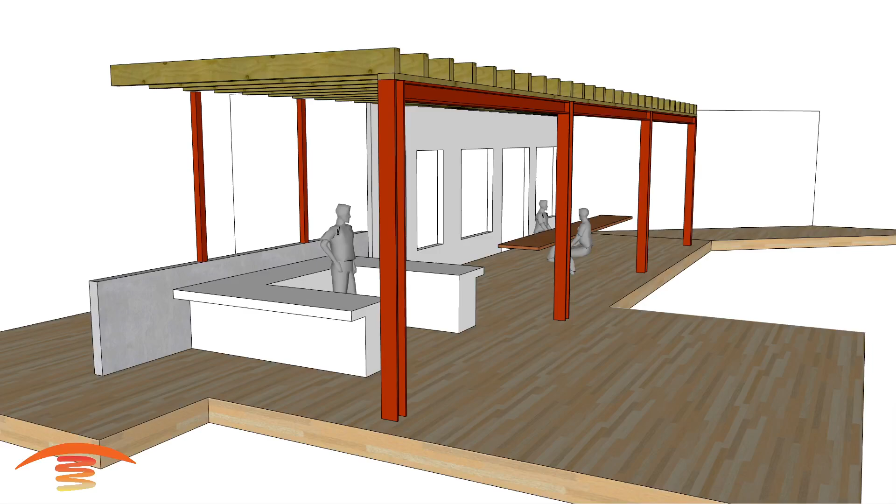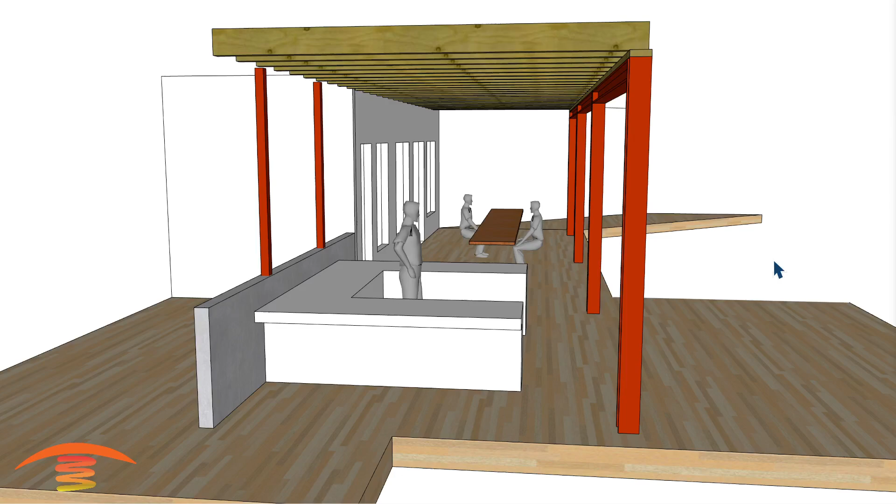Hi, Steve here. So, in reply to your comment that you emailed, I just want to show that I've made a couple of changes, and I wanted to show what I think is the layout that you're looking at, as well as what I would still recommend based on the coverage that you can get with the one that I believe you recommended.

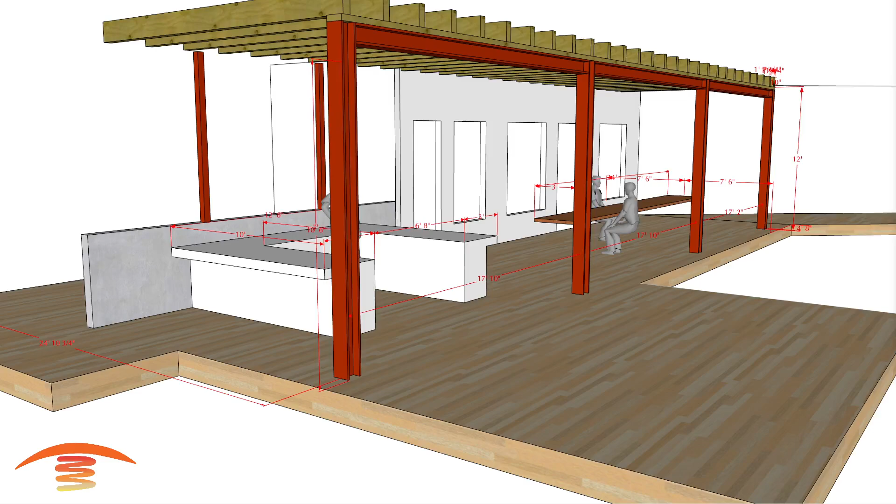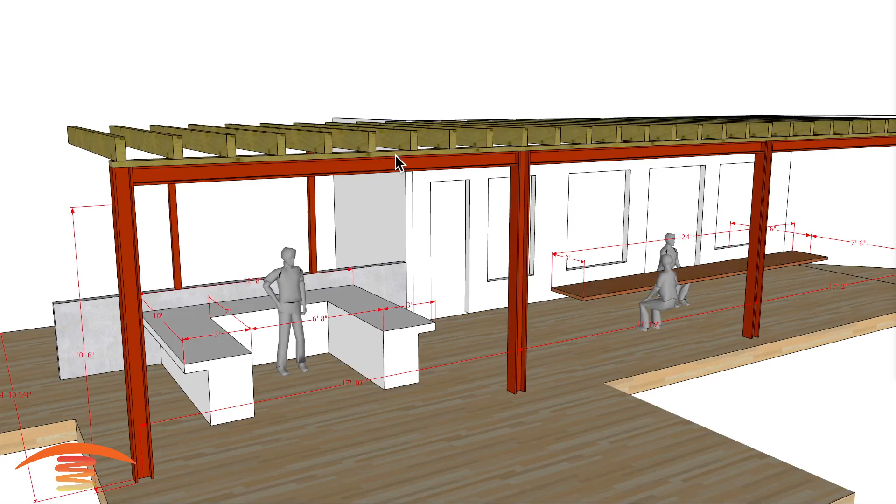So, first of all, let's look at the dimensions. I still have this at 12-foot height, but you mentioned that you have a drop ceiling of 10'6". So I'm assuming that there's some distance between the beams up here and the drop ceiling. So that is going to be important. I have it at 1.5 feet right now, and we'll need a minimum of 8 inches if that is true, and also if the ceiling joists will be going parallel with these upper beams here.

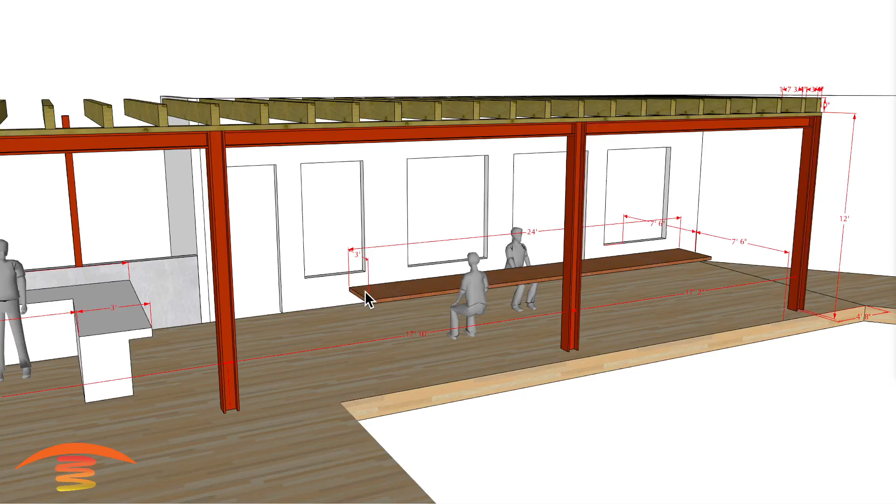The other thing, too, is I don't really know the true dimensions and whether you're looking at heating up the bar area, if this is a bar area on the outside edge. The table here I have still at 24 by 3. And I still have this distance here at 12 feet from the wall to the outer edge here. And I think that's about it as far as that information is important.

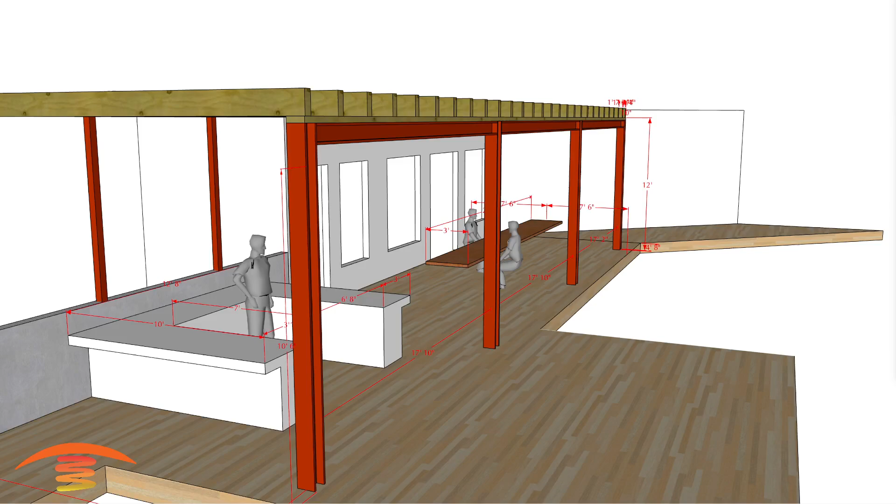Let's go ahead and look at the system that you have in mind: placing the heaters centered within the distance between the table edge here and the beam above. So I put that centered in here, and you can see that the heaters are all pointed straight down. These are 6,000 watt WD models in flush mount kits.

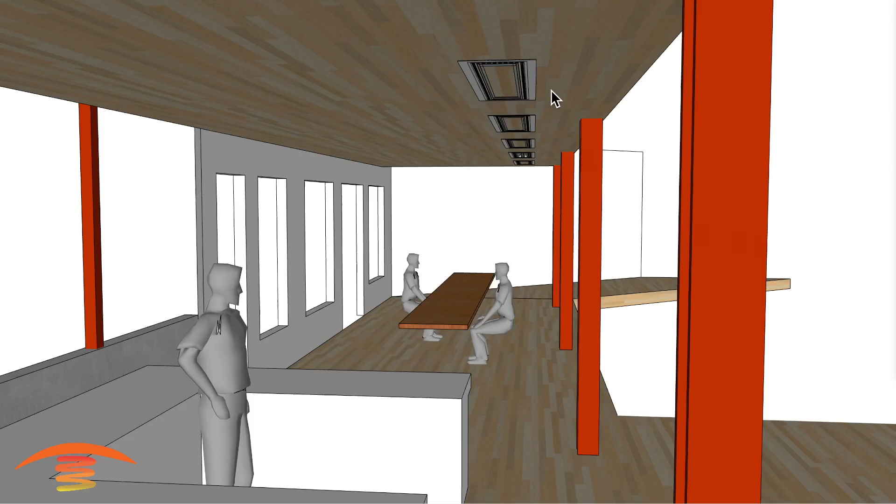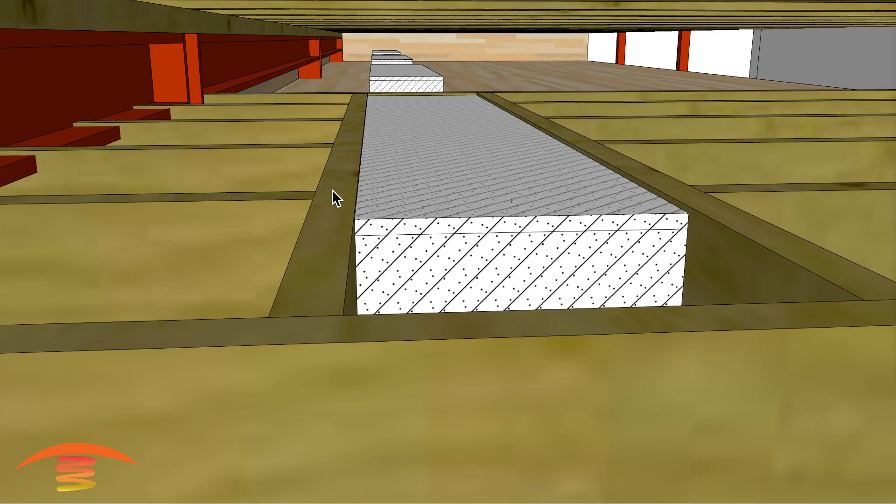The other thing I want you to see is that if you do have these and you have the ceiling joists going in this direction, you're going to need to box that in somehow. So what I've done here is show how the boxed in area for that ceiling is going to have to look. If this can be done, I'm not sure structurally how. Maybe these need to be double stacked or something of that nature in order to get the true support.

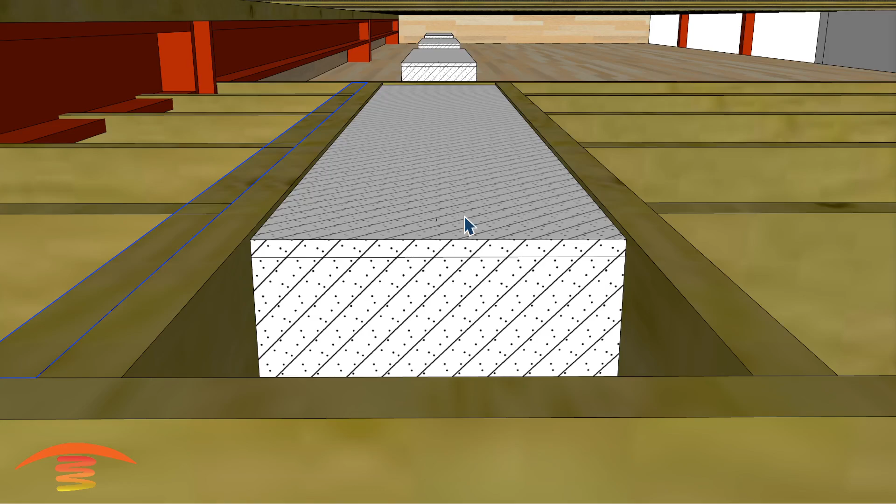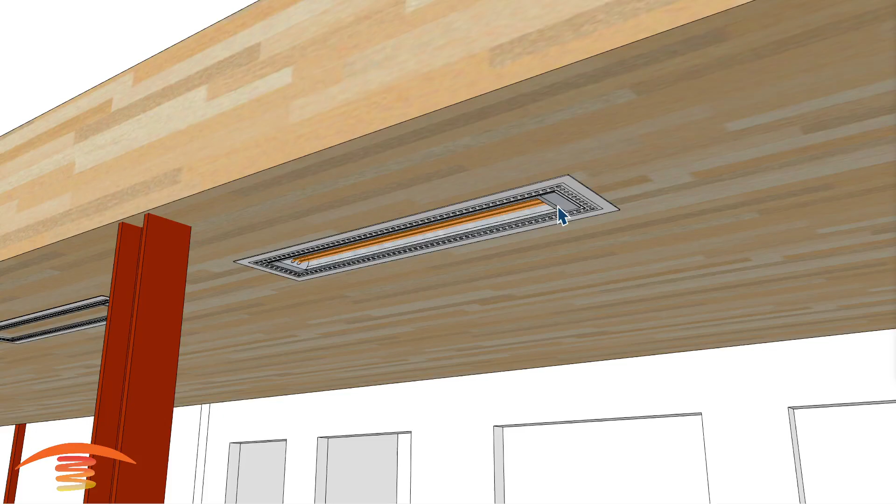But anyways, they need to be a minimum of 8 inches high, and you need to have a 1 hour rated firewall box installed here. So this will be 5/8 drywall, and it has to be around all 4 sides as well as the top in order to use that. So let me go back here too. This is the flush mount kit, and this would be the WD6024 model.

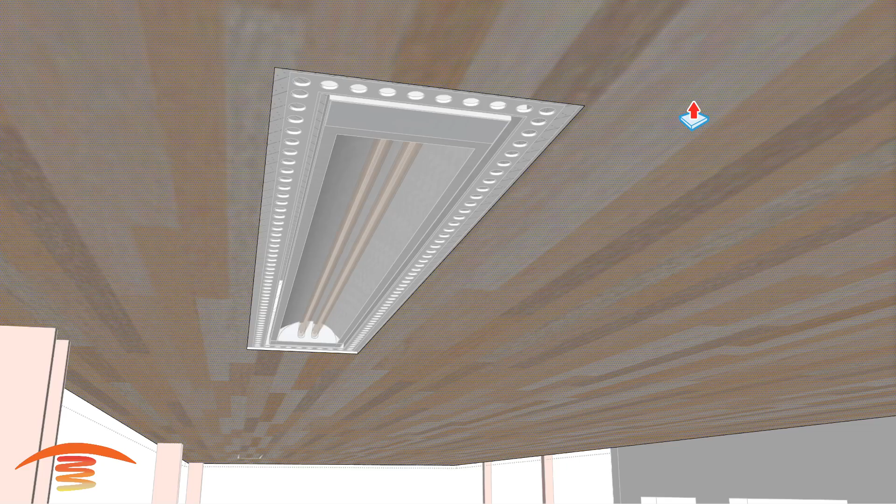Also, you can see I don't have these all done the same way, but this one's showing here because if this is a ceiling, you could have the heater itself mounted on the ceiling with a bracket showing, or you can drop this down. I don't know if it's going to be a wooden ceiling or not, but let's just say it's a 1/2 inch drop. If it's wood, the heater itself needs to be dropped as well, so this heater can drop in the flush mount kit to the same elevation as the ceiling if it's combustible.

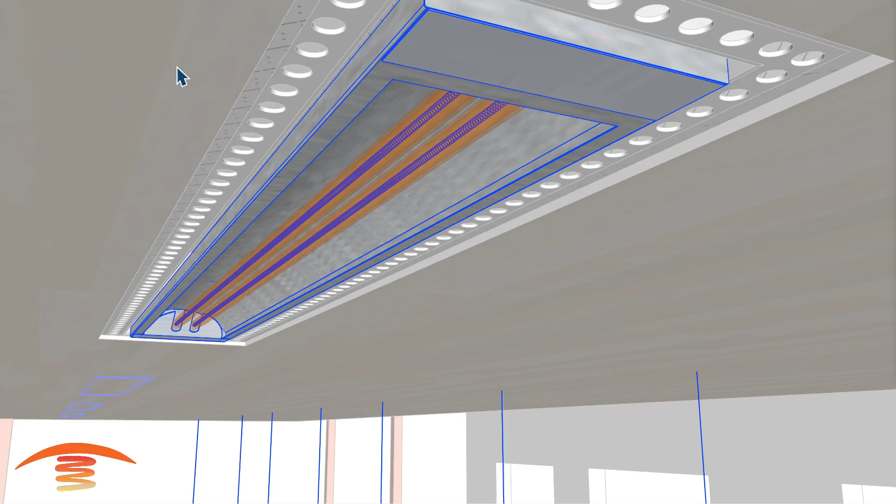So if it's a stucco ceiling, you don't need to do that, but if it's a combustible ceiling, wood or something of that nature, then you need to drop the bottom of the heater to the same elevation as the ceiling itself. I'm going to go ahead and turn that all back here, but I want you to see that it also looks much better.

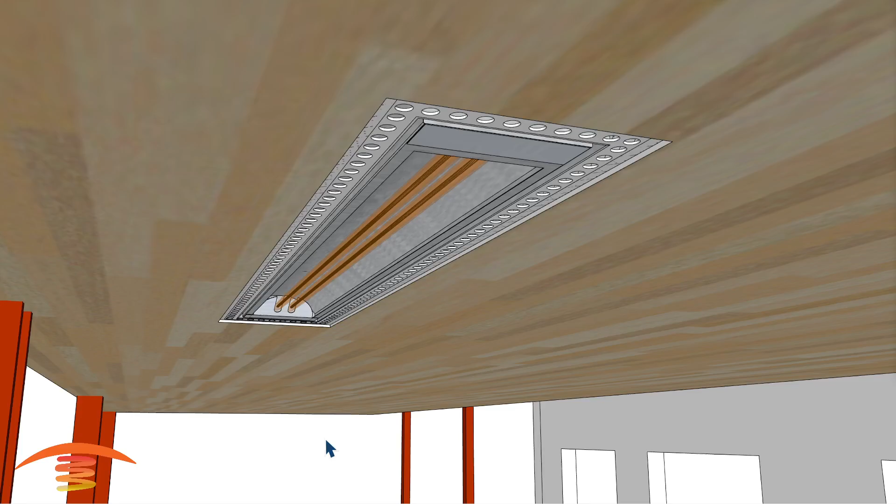Here's what it looks like attached to the ceiling with the flush mount kit, and then going back to pulling this down so that it's covering. You're not going to see the 1 hour fire rated drywall, but you will see the vent holes here. It needs to be 1/2 inch from the vent hole to any combustible surface like that.

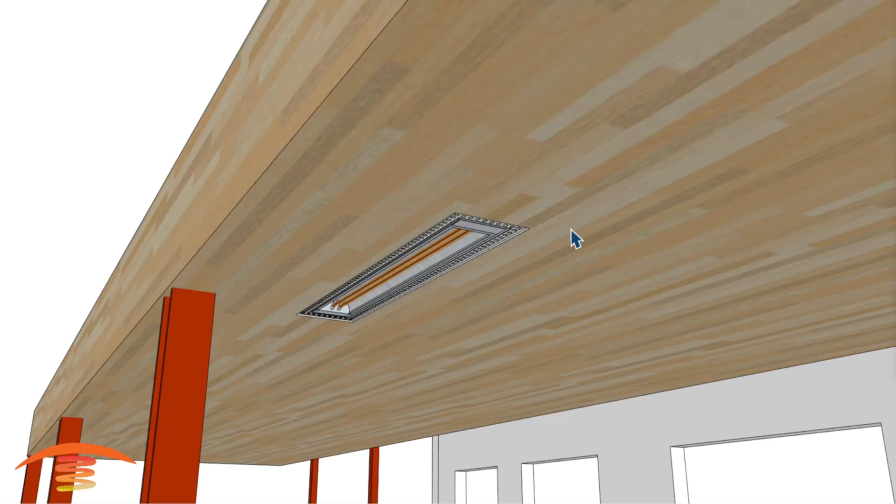As well as any stucco, so that you're getting the proper ventilation around the heater. I wanted you to see that because I think it looks much better in any application than this here itself.

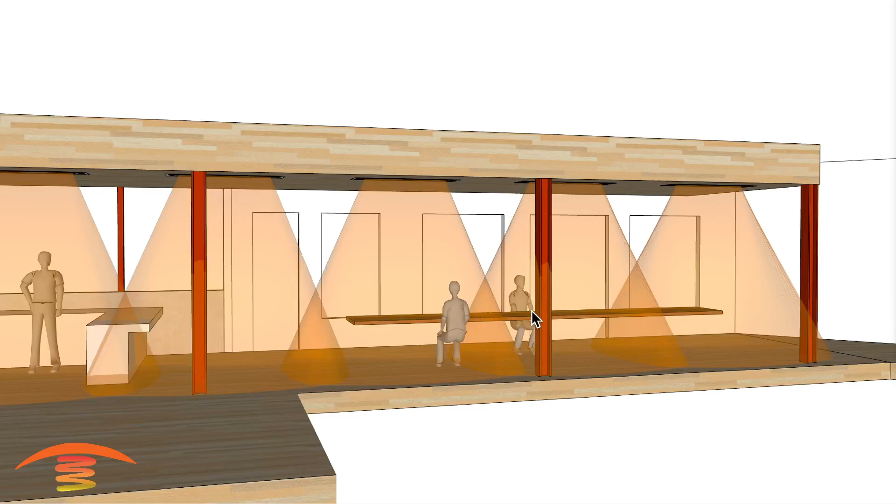Now let's go ahead and look at the footprint of heat that you're going to get. I have 5 units here, and obviously you could move these based on what that requirement is, as far as do you want it to heat up this space here, or is it more acceptable for just a whole line right here.

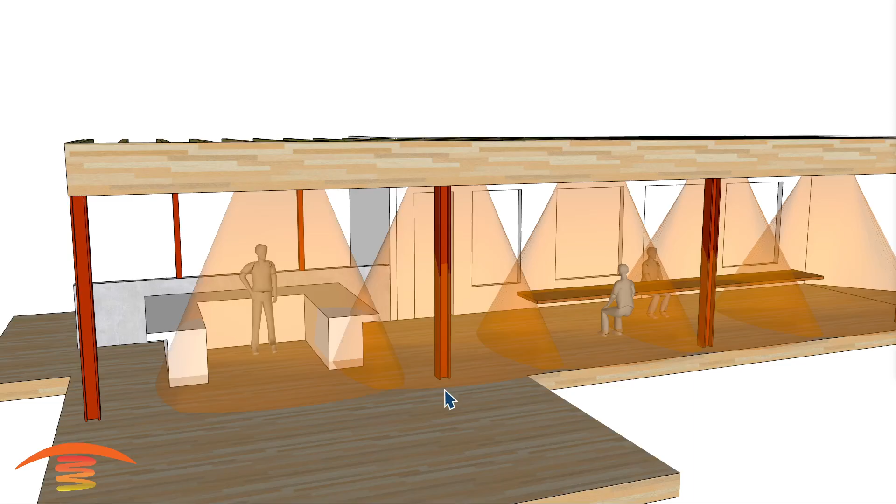But what I really want you to see is this is infrared light. Infrared light wave is not visible to the human eye. However, if you're not in that ray of light, you're not going to feel the warmth at all. It doesn't heat air, it heats mass, tables, chairs, and human bodies.

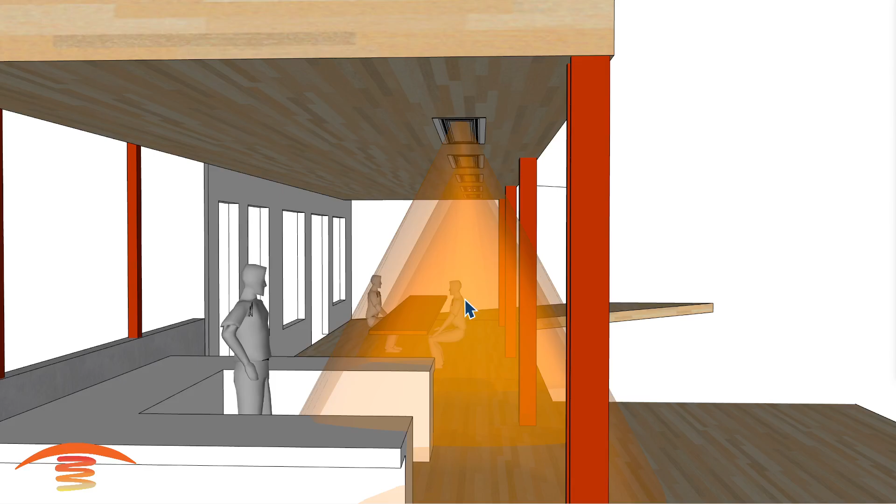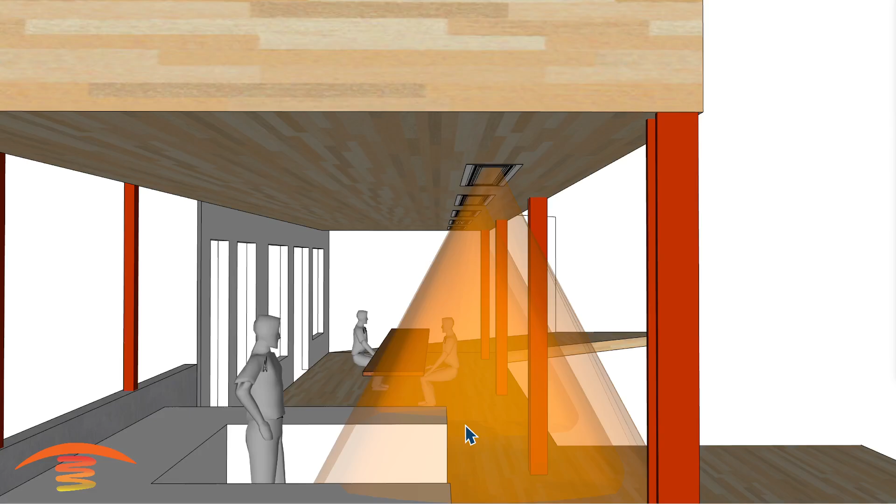So you can see here, this is going to be the only side that's going to be heated properly with it in this layout here. So that's kind of why I'm not choosing that. Now, another thing I should mention is with the flush mount units, you cannot angle the heater so that it is pointed towards this inner edge here. It can only be face down. So that's another thing you need to be concerned about.

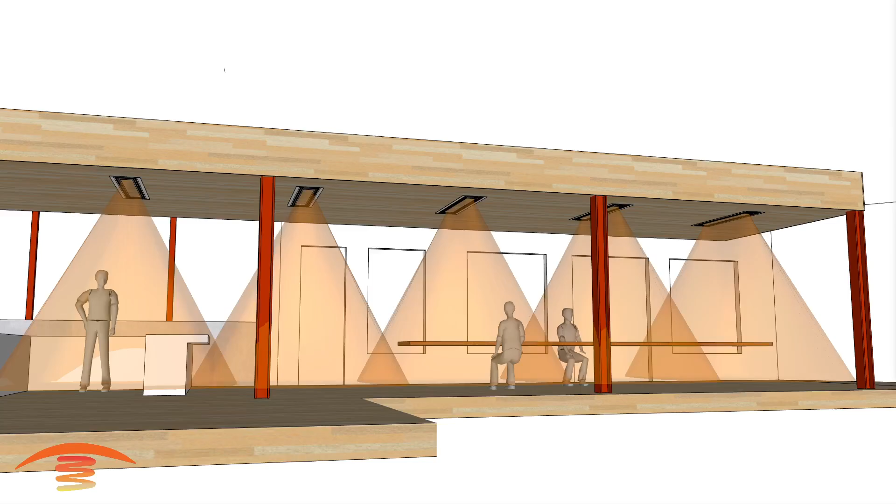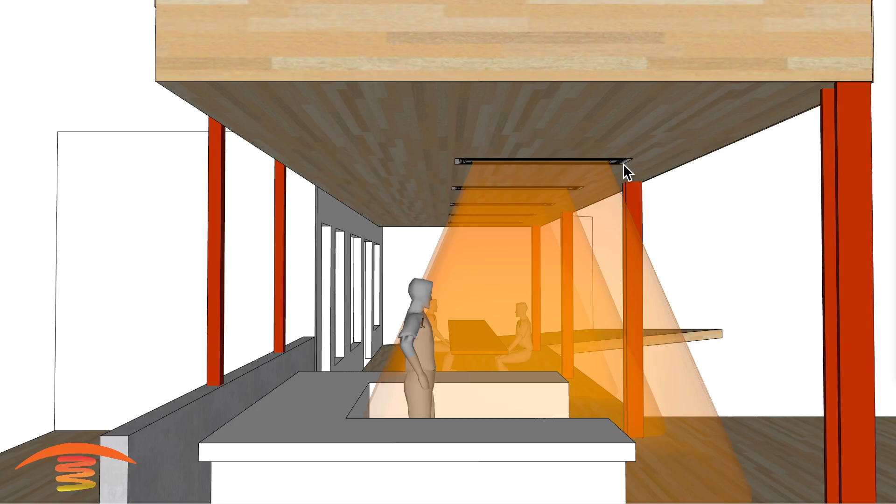Other than that, let's go ahead and look at what I kind of have in mind, more preferable for this application. What I did here is I didn't center the heaters. I centered the edge of the heater based on that point from here to this beam, and that's the starting point of the heater. You can see that it's a 61¼ inch heater, longer flush mount, but now we're penetrating more of the area that's being occupied on this side here with that layout.

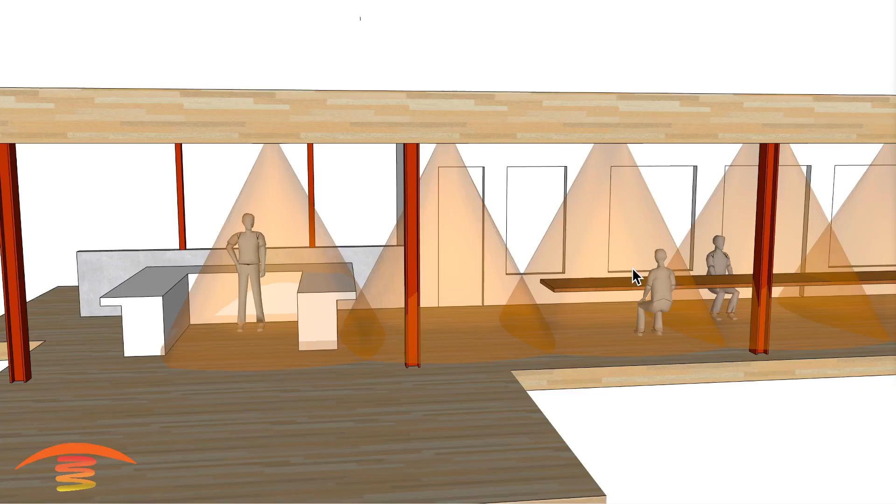Now I prefer it to be centered within the span, but I'm not quite sure what the purpose of having it off-centered would be for you. I'm sure there's some reason that you're suggesting to do that.

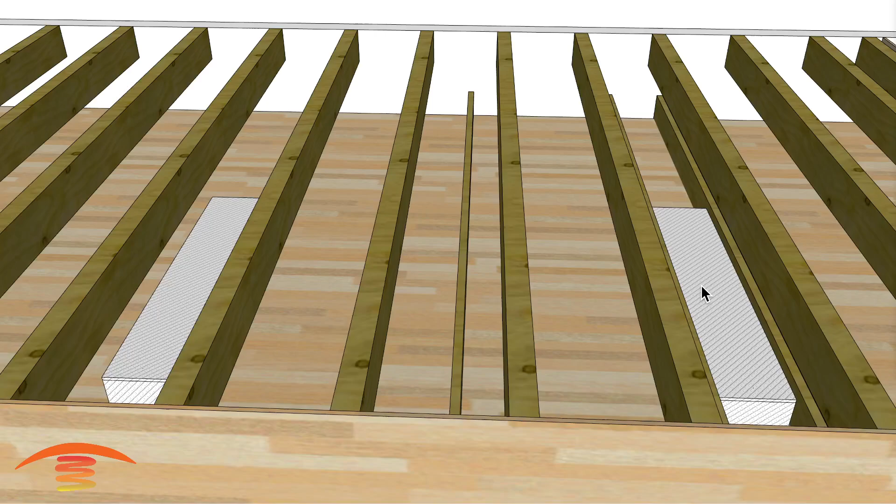Over here you can see that if our ceiling joists are going parallel with these main beams on this drop ceiling, these will fit in quite nicely. If it hasn't been built yet, then obviously you can place these ceiling joists exactly where you want them, so that you can heat this table as best as possible.

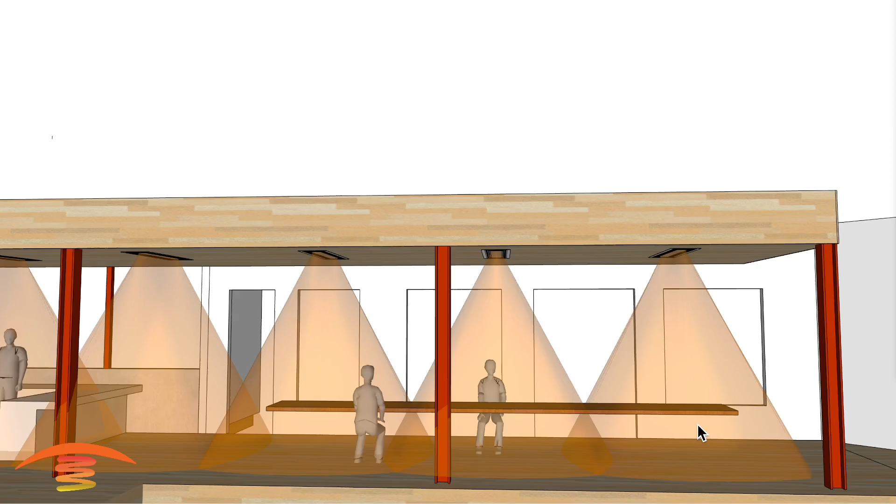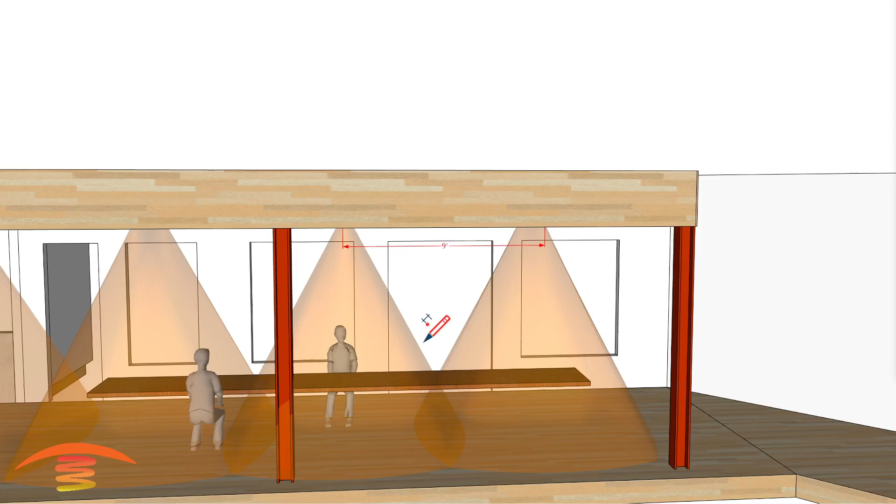What I've done here is I've gone from the center of the table for the first unit, and I believe this is 9 foot center to center. Let me just double check on that real quick. So from here to here, yeah, 9 foot center to center, and that gives you good overlapping in the middle, so this is a cold section, so you do have beams coming out this direction and this direction here. That's not ideal, but they're overlapping, so that makes this whole space more uniform throughout the entire space.

Obviously the ends here aren't heated as well. You'll probably be sitting out a little bit further, but you will receive a little bit of heat there.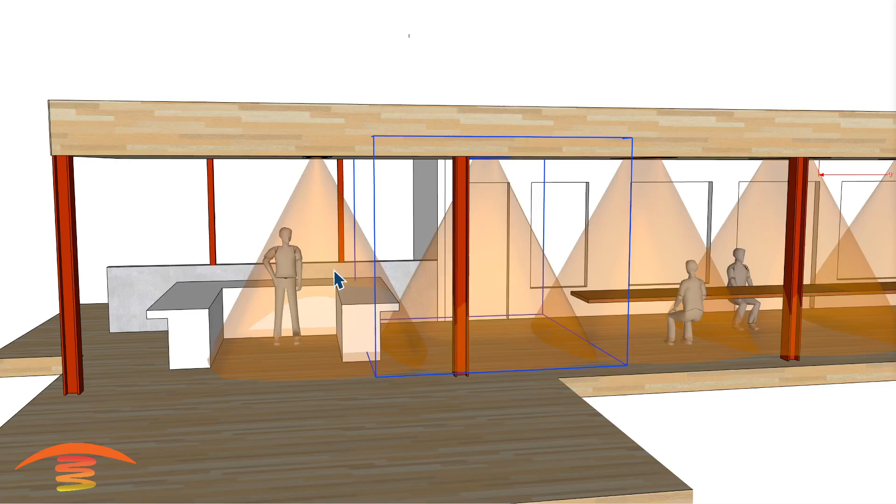Again, do we want these to be moved over so that it's more centrally located, so that if these are seating positions for a bar stool seating position, then you would receive that heat if we centered it over here.

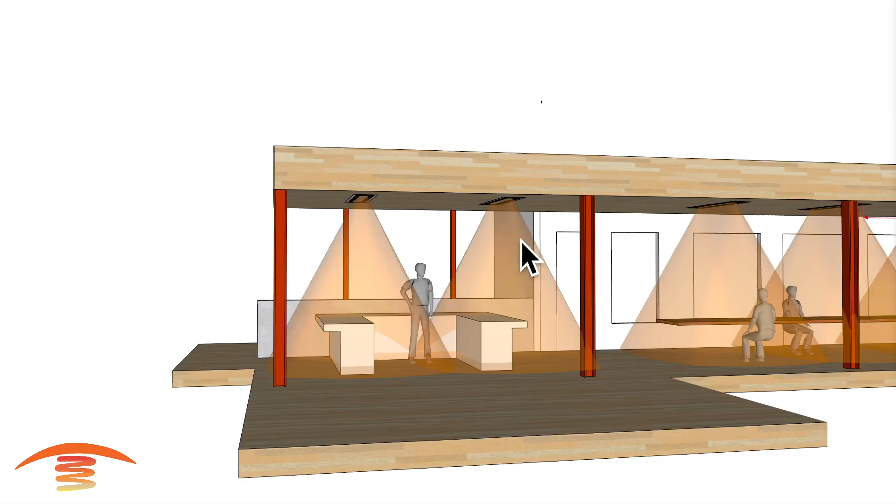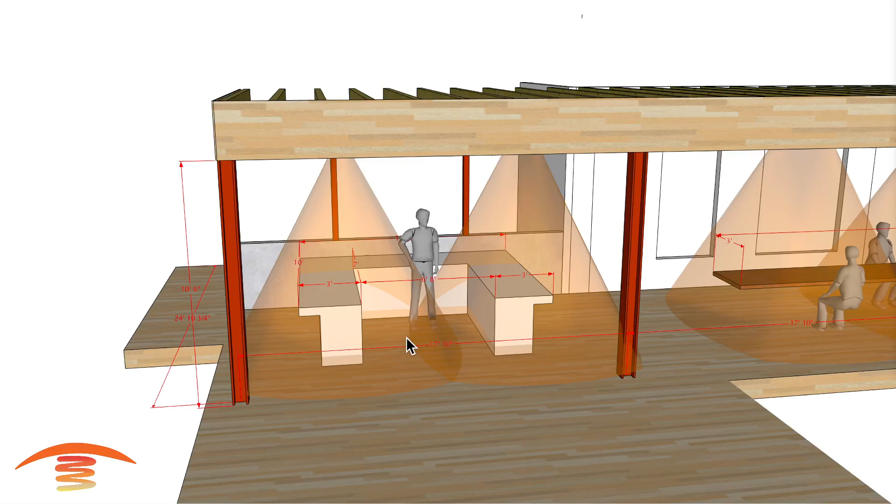Again, 9 foot center to center from the center point of the bar. Now I'm not quite sure of the whole entire distance of this bar, so I can't tell you that it's going to heat up the whole bar area properly, but here I have from here to here at 6'8", and then 3 foot here. So we're essentially at 12.5 feet roughly in my drawing. Again, that 10'6" ceiling height is what I have.

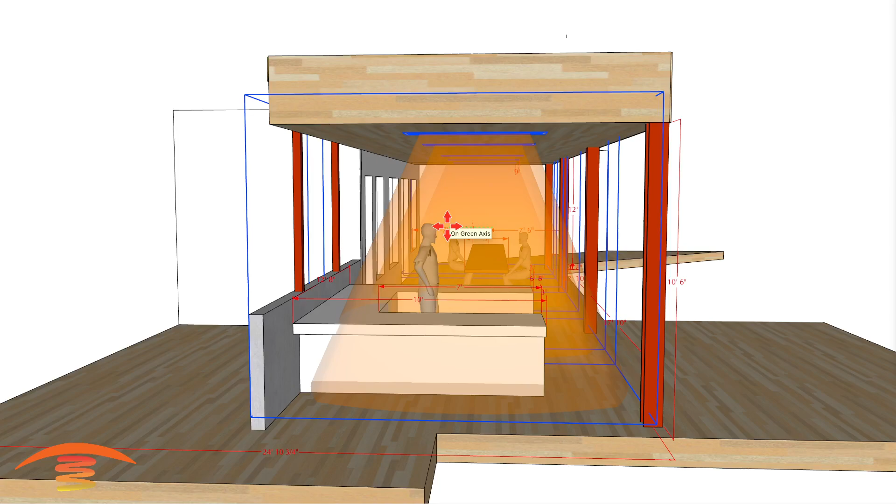So in any case, this would be my preferred still, and even more so, I would love to have the heaters more centrally located in the bar area, or in this whole space here. This is moving over 1 foot 9 inches off this center point that I mentioned before. So you can see here now we even have a better footprint of heat on the table area, as well as more of the bar stool, if that's true, heated properly.